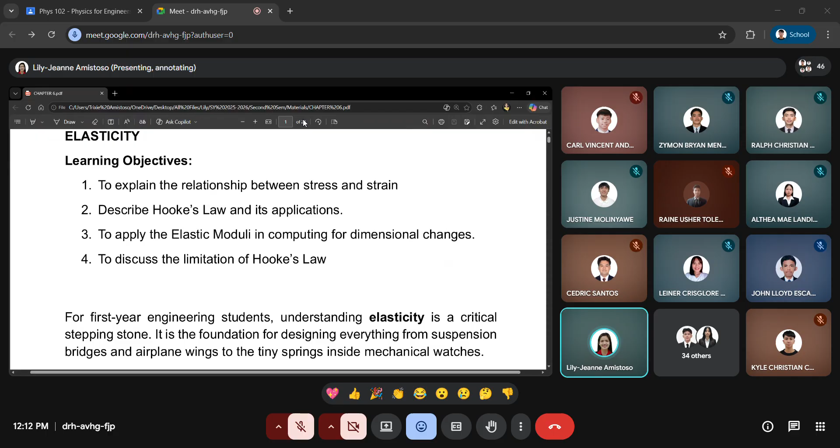So it is very important to understand elasticity for a first-year engineering student like you guys, kasi this is a critical stepping stone. It is the foundation for designing everything from suspension bridges and airplane wings to the tiny springs inside a mechanical wristwatch. So, di ba, sabi ko nga broad yung applications niya in different fields of engineering, mostly in civil engineering, aeronautics engineering, and mechanical engineering.

So at its core, elasticity is a material's ability to resist a distorting influence and return to its original size and shape when that influence or force is removed. To further understand these concepts, engineers quantify this into three fundamental concepts. Hinati po siya. Number one is stress, number two is strain, and number three is Hooke's law. So our discussion for this chapter will revolve around these three: stress, strain, and Hooke's law.

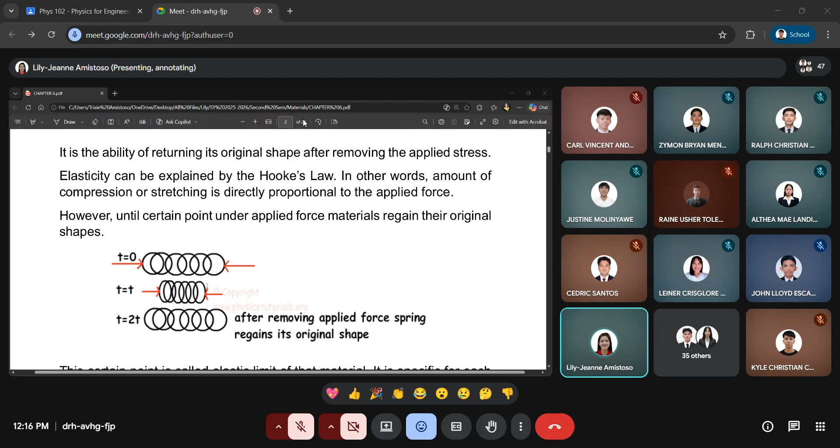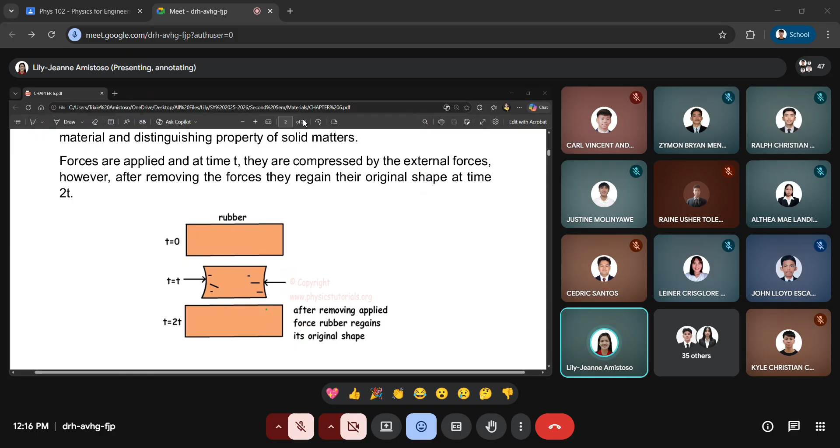Another visual illustration, same lang 'to but different material. For the rubber naman, at time equal to 0, wala pa tayong ini-insert na force, tas kinompress natin siya at time equal to t. And pagdating po ng time equal to 2t, our object will go back to its original size and shape. Naiintindihan po ba ang concept ng elasticity? Questions, clarification? More on the concept muna tayo before we proceed with any computation.

Okay, let's proceed with Hooke's law. Hooke's law is the scientific rule that explains how springs work. So sinasabi lang naman dito sa Hooke's law, for example, you have a spring in your hand. If you pull the end apart just a little, kung konti lang daw po yung i-insert natin na force, therefore, yung pag-pull back daw po ng spring, gentle lang. However, if a larger force is inserted, therefore daw po, the spring will fight much harder.

So Hooke's law simply states that the distance a spring stretches or compresses is directly proportional to the force applied. Ibig sabihin po, if you double the force pulling on the spring, it stretches exactly twice as far. Ibig sabihin, force is directly proportional to the displacement. Na-encounter naman na natin itong formula na to for force.

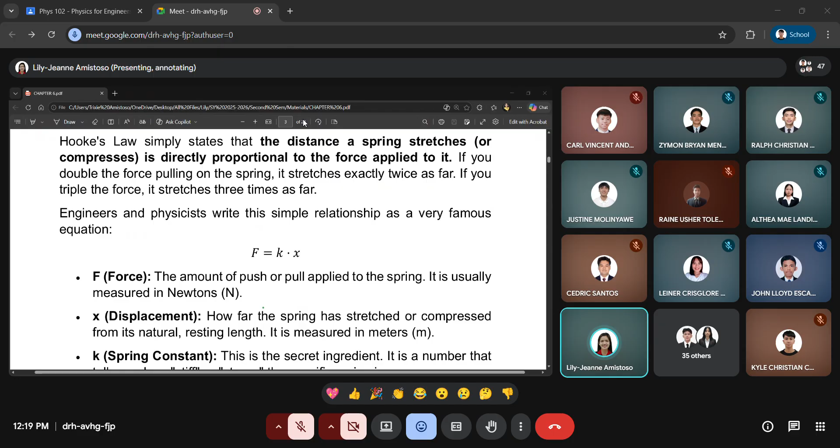Some references use F = -Kx po. That negative sign just indicates that the spring is pulling back in the opposite direction. That is called the restoring force. Hooke's law was first stated formally by Robert Hooke in The True Theory of Elasticity or Springiness in 1676, which states that extension is directly proportional to force.

Again, ang sinasabi lang naman dito sa Hooke's law is that directly proportional nga po si force kay displacement natin. Therefore, kapag mas matigas po yung force na in-apply natin, mas mahaba yung pagka-stretch niya or mas mahaba yung pagka-compress.

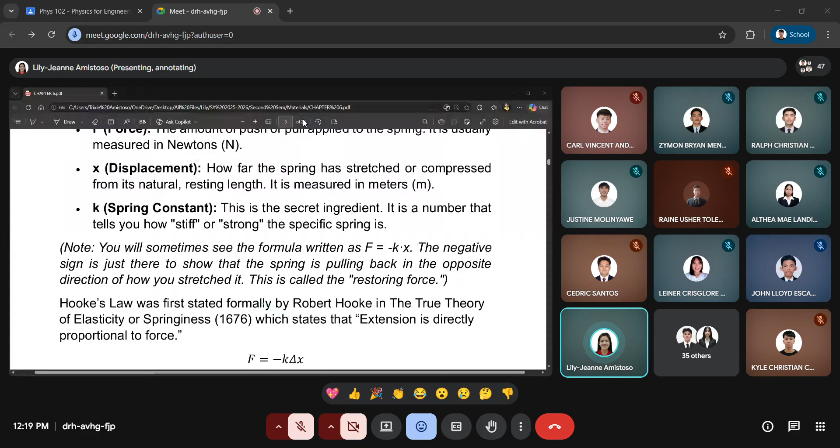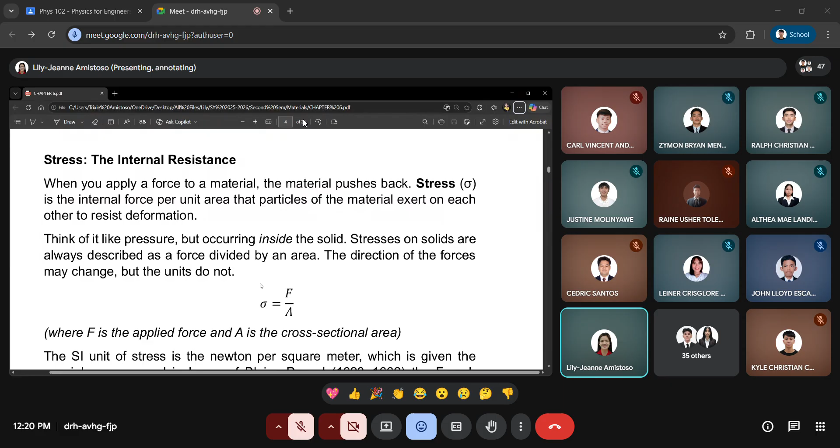So, let's talk about stress and strain. Stress is the internal force per unit area that particles exert on each other to resist deformation. Again, that is an internal force over unit area. So from the definition itself po, makukuha na natin yung formula for stress, that is equal to force over area. Si stress natin is denoted by the symbol sigma.

Ano normal stress natin? Nasa parang O na may kuwit sa taas. Sigma. That is our stress. This is equal to force over area. Ito po ay force, ito po ay area. Your force should be measured in Newton, while our area should be measured in meters squared.

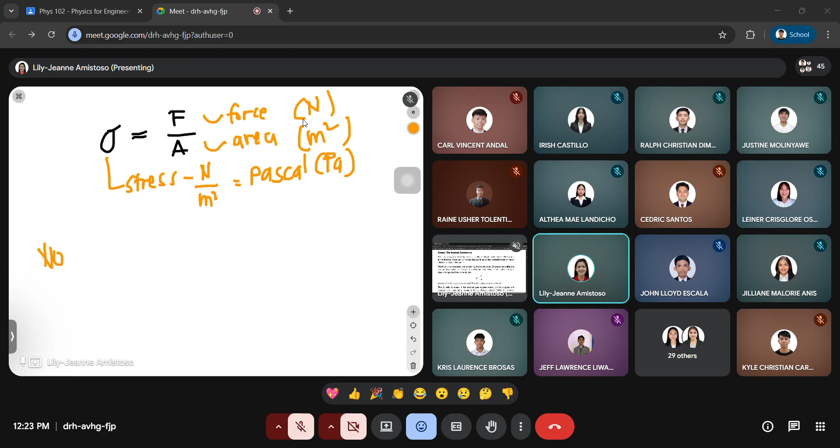All of them depend on... Again, kapag ang nabago lang sa ating object ay length, it's either humaba or umiksi yung object natin. Therefore, that is a normal strain. However, if there is a change in shape, siya po ay shear strain. For example, from a rectangle, naging parallelogram siya. Therefore, shear strain po tayo.

And lastly, kapag naman bulk strain ang pinag-uusapan natin, there is a change in volume for our object. Kasi ito pong si bulk strain is also known as volumetric strain. Naiintindihan po ba ang difference between these three? Again, for normal strain, that has a change in length. For shear strain, we have a change in shape. And for bulk strain, we have a change in volume.

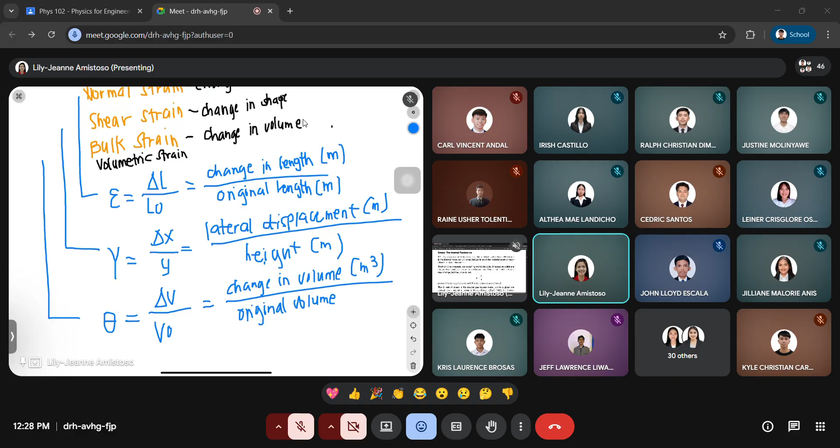And lastly, for bulk strain naman po, this is a change in volume sa ating object. So, ibig sabihin, ang formula for this kind of strain depends on the volume and the change of volume ng ating pong object. For bulk strain, this is denoted by the symbol theta, and this is equals to the change in volume over original volume. This is measured in cubic meters over original volume. Again, any strain po ay unitless po. Malinaw po ba?

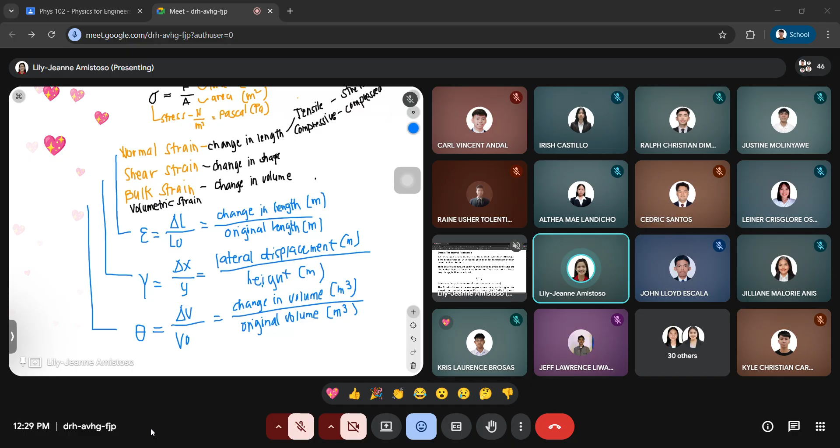Okay. On page number 258 naman po ng lecture notes ninyo, nandiyan naman yung summarized version ng sinabi ni Miss. So, we have there yung strain units natin. Again, we have three types of strain: linear, shear, and volumetric or bulk strain. For linear, we have the symbol epsilon. We have gamma, yung parang Y, and we have theta for bulk strain naman po. So, these are the formulas din po. Then, for the unit, again, that's unitless. Kasunod ba?

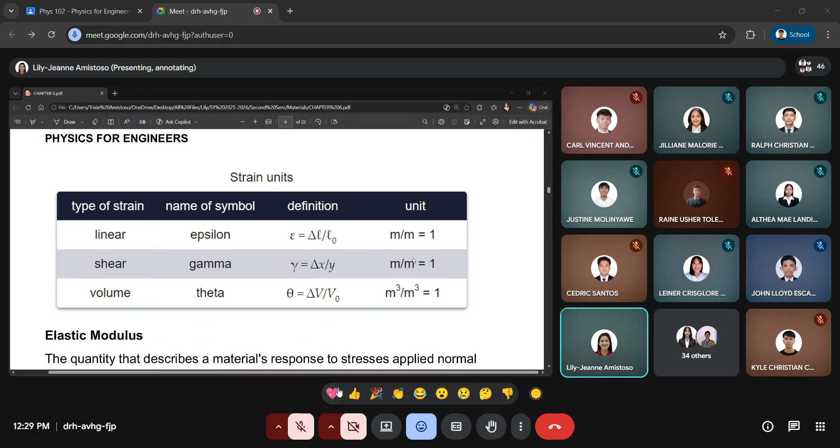Okay, next naman tayo. We have the elastic modulus. The quantity that describes a material's response to stress applied normal to opposite faces is called Young's modulus in honor of the English scientist Thomas Young. He was not the first to quantify the resistance of materials to tension and compression, however, he was the most famous proponent. That's why ipinangalan sa kanya ito.

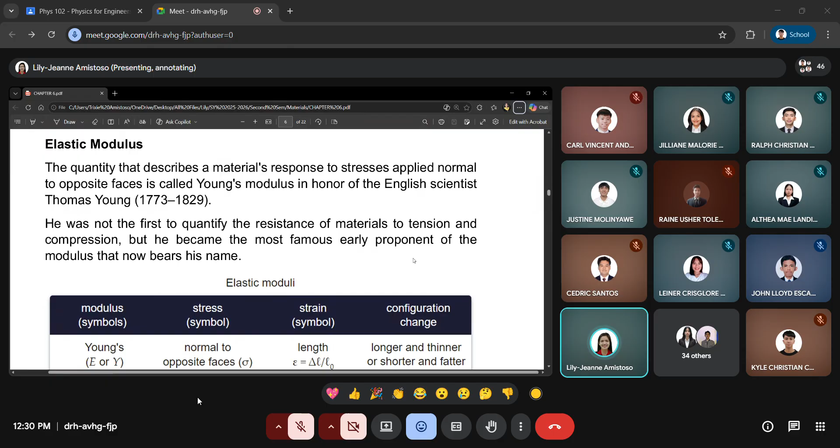So, for elastic moduli po, for each of the strains we have different modulus of elasticity or elastic moduli for each of the materials that we have. So, kindly look at the table na meron po tayo. Kapag meron tayong strain, ibig sabihin yung object natin ay na-shorten or na-lengthen, therefore, we are going to use Young's modulus of elasticity. Young's modulus po is denoted by the symbol E or Y, depending na lang kung ano yung gusto nyong gamitin. Some references use E for Young's modulus, some references use Y.

Kapag naman po ang nabago sa ating object po is the shape, again, from rectangle, naging parallelogram siya. Therefore, we have shear modulus of elasticity. So, for the shear modulus naman po, that is G or S. And kapag naman po there is a change in volume but not change in shape, ibig sabihin we have the bulk modulus of elasticity. Again, here are the units or symbols for our strain sa third column po natin

as well as the formula. For stress naman po, different changes din sa ating material, iba-iba din po ang symbol. Kapag length ang nabago, ang symbol ng stress nila ganito, sigma. Ganito naman, parang T na maliit kapag naman po nabago yung shape, and P naman po kapag nabago yung volume. Iba-ibang symbol, iba-ibang changes sa ating object. Malinaw po ba?

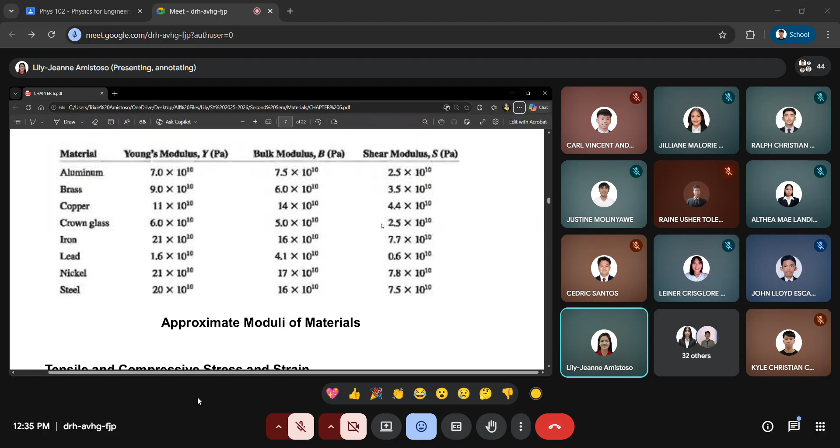So, ang sinasabi lang naman dito sa tensile and compressive stress and strain, ibig sabihin, we're talking about ano nga yung tensile and compressive stress and strain po natin? These are normal stress and strain. So, if we are talking about this normal stress and strain, ano yung symbol natin for normal stress and strain respectively? For stress, we have the symbol sigma, and for strain, we have the symbol epsilon.

Sabi lang naman po, there is a relationship between Young's modulus of elasticity, stress, and strain po. So we have Young's modulus of elasticity is equals to stress over strain. So, kung i-a-apply natin ang formula natin for stress, we have force over area. And for a normal strain, we have delta L over L0. Tama po? Numerator ay formula natin for stress, force over area. Ang denominator ay delta L over L0. That's the formula for our strain.

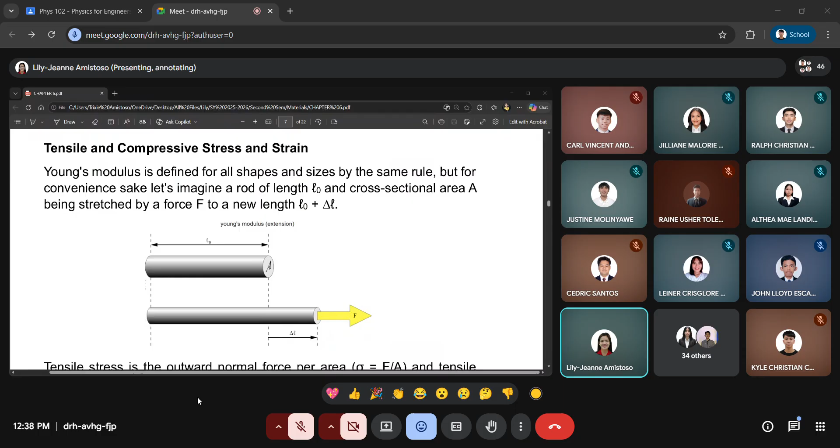So determine the stress, the strain, and the elongation of the rod. So what to do first? What I need to do first is to understand the problem itself. Pag na-understand nyo yung problem, made-determine nyo yung changes sa material. Is there a change in length, a change in shape, or a change in volume? Alam nyo yung mga symbols na gagamitin natin when we identify the given and the unknown sa ating problem.

So, based on your understanding sa problem, ano yung nangyari, yung change sa ating steel rod? Meron ba tayong change in length? Meron ba tayong change in volume? Or meron po ba tayong change in shape? Saan sa example number 1?

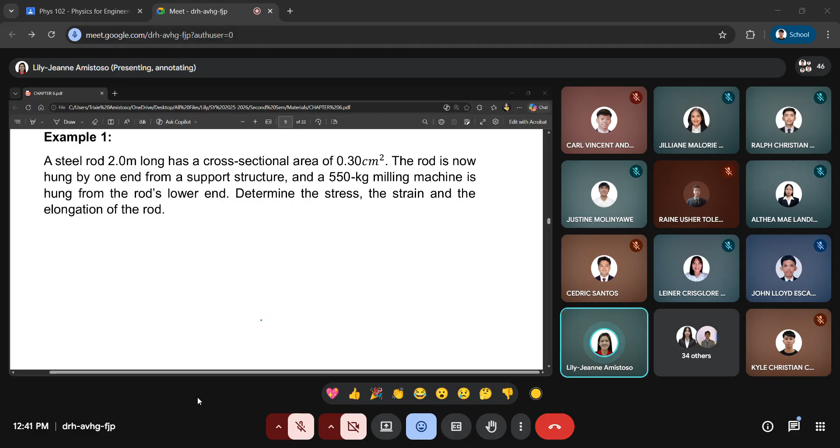Nakakasunod ang lahat? Ganito din, titingin din. Again, sabi nyo meron tayong change in length. Now, balikan natin yan mamaya.

Based po dyan sa problem, ano yung mga given na meron po tayo? Isa-isahin ninyo. Sabi dyan, the steel rod is 2 meters long initially. So, we have the original length of the rod that is equals to 2 meters. Sabi din dyan, we have a cross-sectional area, 0.30 cm squared. The rod is now hung by one end from a support structure, and the 550-kilogram milling machine is hung. Therefore, we have a mass of 550 kilograms.

Tama po? Since there is a change in length, tinatanong ang stress. Therefore, ang symbol natin ay sigma, epsilon, and change in length. Yan yung mga hinahanap sa atin. Tama po? Makakasunod ba?

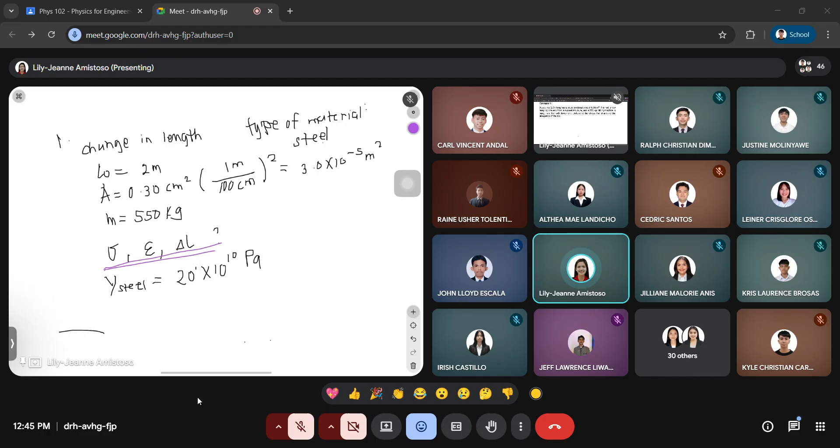Ito yung mga ano natin, we are tasked to find the normal stress, the normal strain, and yung ating change in length. Unahin natin si stress. Ano nyo kukunin si stress out of all the formulas that we have? What is the formula that we are going to use in order for us to get si stress po?

Anong formula na gagamitin ninyo?

Okay guys, what of the formula that we have? Paano nyo kukunin ang stress natin? So we have the formula for stress that is equals to force over area po. May given ba tayong force?

May given po tayong force? Wala po, pero anong meron tayo? We have the mass. So for us to be able to get the force, we are going to multiply mass multiplied by our gravitational acceleration, all over our area.

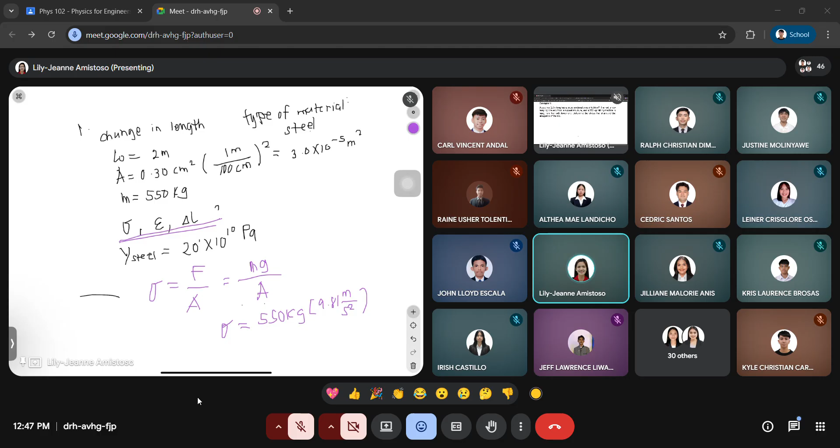Yun na po, so substituting the values that we have: 550 kilograms multiplied by 9.81 meter per second squared, meron tayong force in Newton, divided by our area po in meter squared, that is 3.0 times 10 raised to the negative 5 meter squared. Meron na po tayong stress in Newton per meter squared, or simply Pascal.

So ang value for stress natin ay 179,850,000 Pascal, or pwede nyo po siyang i-scientific notation, that's 1.7985 times 10 raised to the 8 Pascal. Both are acceptable answers.

Now, hinahanap din sa atin, diga, okay na tayo dun sa first unknown, si stress. Hinahanap sa atin si strain. Ano naman po yung working formula na gagamitin natin in order for us to get yung strain natin? Ano, kung kayo yung magsasagot sa exam, paano nyo kukunin si strain?

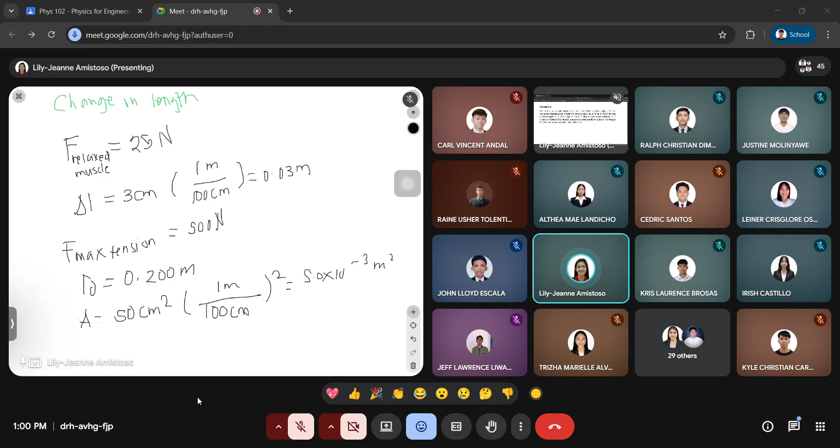So these are all our given sa ating problem. Kasunod ba ang lahat? Again, proper identification of the given are necessary for you to be able to come up with the correct answers po, kasi direct substitution lang naman to kapag converted na yung values. Ano, ang hinahanap sa atin ay what are the Young's modulus for each of the conditions ng ating muscle. So dalawang Young's modulus kasi dalawang condition ang meron tayo.

Young's modulus for the relaxed muscle, no correction for this formula, at Young's modulus for the maximum tension. Now, what formula for Young's modulus ang gagamitin ninyo in order to find yung ating mga unknown?

Meron tayong dalawang working formula for Young's modulus. Are you going to use stress over strain or are you going to use the derived formula po natin? So when it comes to this one, you may get first the stress, then the strain, or pwedeng direct na po kayo with the derived formula, mas madali kasi. Kasi by that, substitute na lang tayo nang substitute.

Kunin muna natin si Y ng relaxed muscle. Sabi ni Jeff, so you will be using the derived formula. Ang derived formula po natin ay F L0 over A delta L. Tapos direct substitution na tayo.

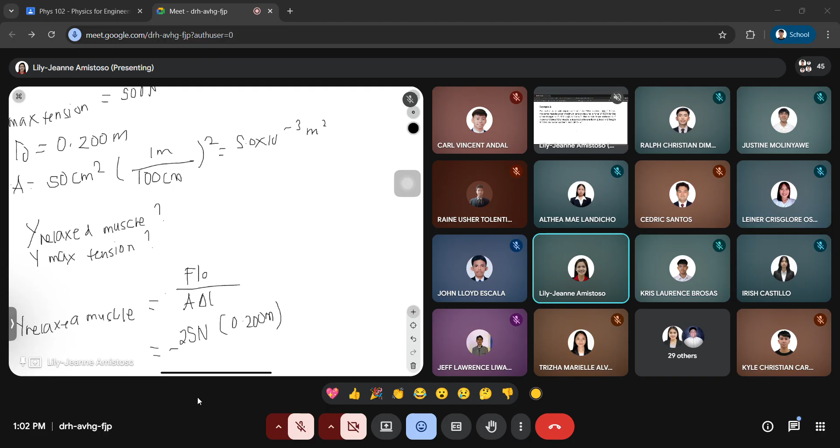Since we are talking about the relaxed muscle, ibig sabihin, force muna ni relaxed muscle, which is 25 newtons. Multiply by 0.200 meters, that's the original length, all over our area na 5.0 times 10 raised to the negative 3 m squared. And lastly, for our delta L, that is equals to 0.03 meters. Kuha na natin agad-agad ang ating Young's modulus for relaxed muscle.

That is equals to 33,333.3333 Pascal. Or again, pwede nyo siya i-scientific notation, 3.3333 times 10 raised to the 4th Pascal.

Dalawang Young's modulus ang hinahanap natin since dalawang condition ang meron tayo. Kunin naman natin Young's modulus for maximum tension. This is equals to, again, F L0 over A delta L. Again, we are going to use the force naman ng ating maximum tension, which is 500 Newton, and all the conditions are the same.

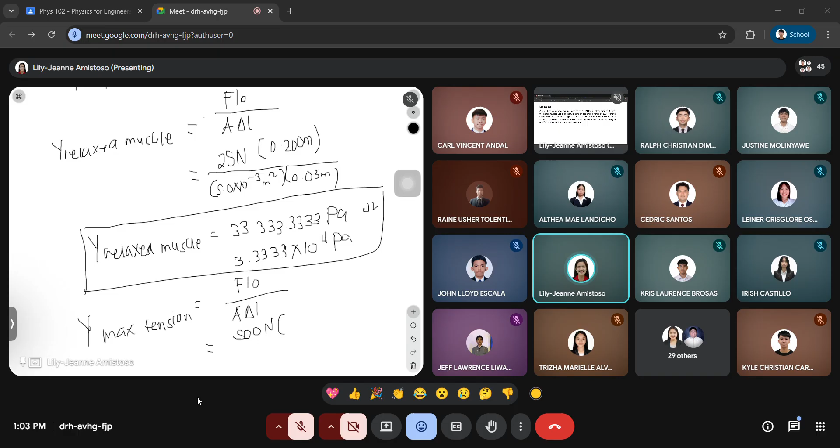We have for the original length, 0.200 meters, all over our area na 5.0 times 10 raised to the negative 3 m squared, multiplied by 0.03 meters. Ang Y for our maximum tension naman po is equals to 666,666.6667 Pascal or 6.6667 times 10 raised to the 5. So that's how we solve example problem number 2.

Again, if may questions, clarification po, feel free to raise your questions. Diba? Hindi siya kasing komplikado ng mga dati nating problem solving. Kailangan nyo lang i-identify ng tama yung mga given sa atin pong problem. Malinaw ba?

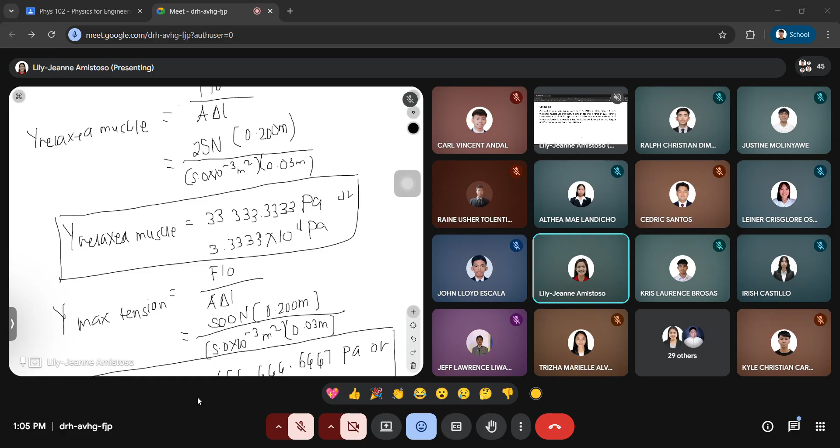Okay, number 3 tayo. Go to the next page of your lecture notes para mas masanay kayo. For number 3 naman po: a circular steel wire, 2 meters long, must stretch no more than 0.25 centimeter when a tensile force of 400 Newton is applied to each end of the wire. What is the minimum diameter required for the wire?

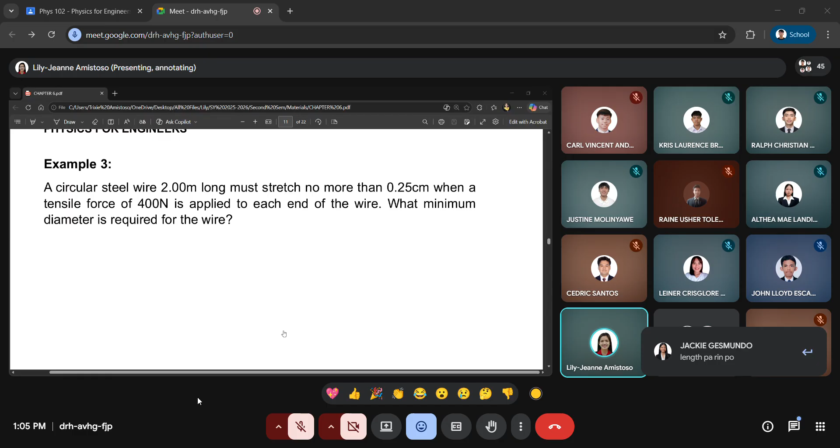So again, intindihin yung problem, then we need to identify ano yung changes na nangyari sa problem 3. Ano yung changes na nangyari? Is there a change in length, a change in shape, or a change in volume? Hintayin ko muna. Length pa rin po. So sabi ninyo, meron pa din tayong change in length.

Now, i-identify ninyo ano naman yung mga given na meron tayo sa problem number 3. Sabi ni Irish, we have type of material, steel. Kapag meron na tayong change in length, na-identify nyo na yun yung nabago, and meron kayong type of material, balik na agad kayo dun sa table. Ano yung makukuha nyong value sa table po natin?

We have the what? 20 times 10 raised to the 10th power, that is the Young's modulus ng steel, equal to 20 times 10 raised to the 10 Pascal. Okay, now, with all the informations provided to us by problem number 3, ano naman po yung ating mga given?

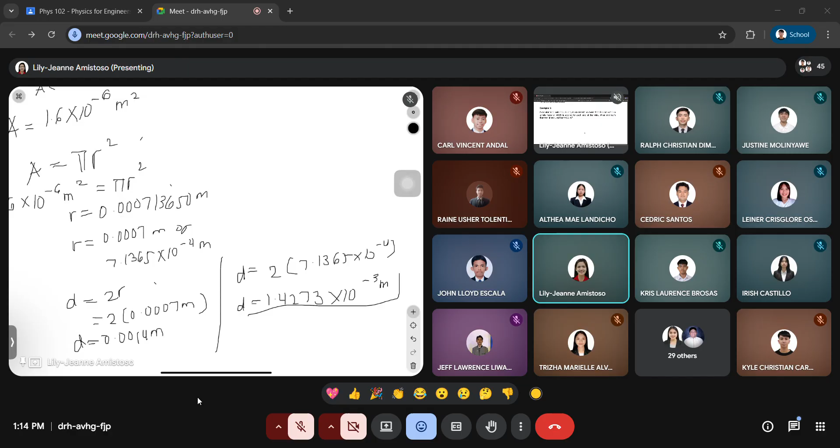However, hindi naman po radius ang kinukuha sa atin. We are tasked to find the diameter. And ano yung relationship ng diameter and radius when it comes to a circle? Diameter is twice the radius. If you are going to use yung decimal po, 2 times 0.0007 meters, ang value for our diameter is 0.0014 meters. Or if gagamit naman kayo ng exponential form, 2 times 7.1365 times 10 to the negative 4, ang diameter nyo should be 1.4273 times 10 raised to the negative 3 meters. Again, both are acceptable answers. Malinaw po ba?

Malinaw ba? Any question? Hindi siya kasi komplikado kumpara sa other chapters natin. So I hope naintindihan ninyo. Di ko lang talaga ma-assess isa-isa kasi hindi ko kayo kaharap. Kung face to face ko 'to tinuro, makikita ko kung nage-gets ba ng lahat. So again, kung naiintindihan niyo, a simple thumbs up will do. If hindi naman po, you may raise your hand or raise your question sa atin pong message box.

So tapos na tayo ng ating discussion with the materials that undergo a force and nagkaroon ng change in length. Next time, we are going to discuss naman yung material kapag nagkaroon tayo ng force, ang visible naman na changes is a change in shape, kaya change in volume. So last two topics na natin for this chapter and kaya na natin siya tapusin sa next meeting natin, para yung remaining meeting natin for the week, ibibigay ko sa inyo para mag-aral kayo for the upcoming quiz. Next meeting, we continue with change in volume and change in shape. Then after that, I'll be announcing the type of exam for the quiz.